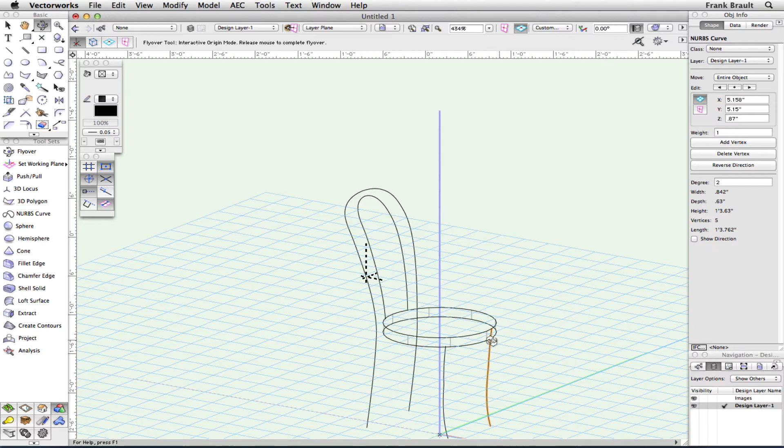Now I do want to get the shape of this thing going underneath, let's take a look what's happening. From the side, it comes around, so it follows this curve here, but it's a little smushed. So that's exactly how I'm going to do it.

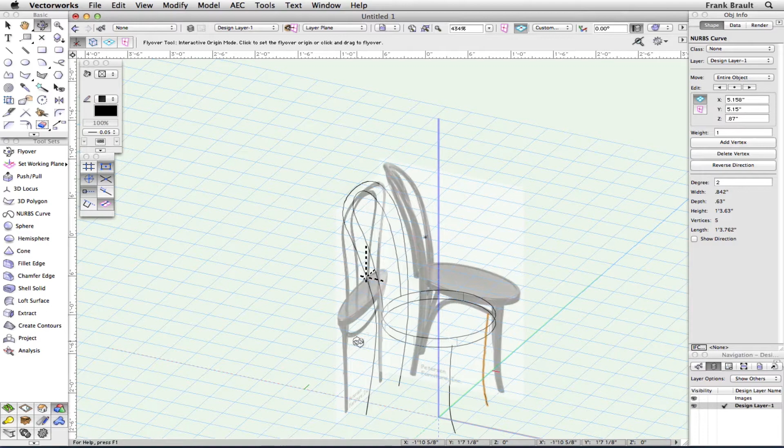I'm going to start with an arc to get that smushed look, and then from the back here I'm going to try to see this corner here. So I have to tilt it down, and then bring it around to the side. That's what I'm going to do next.

I don't need the images, so I'm going to turn them off. Look at it from the front and the top. And now I'm going to start.

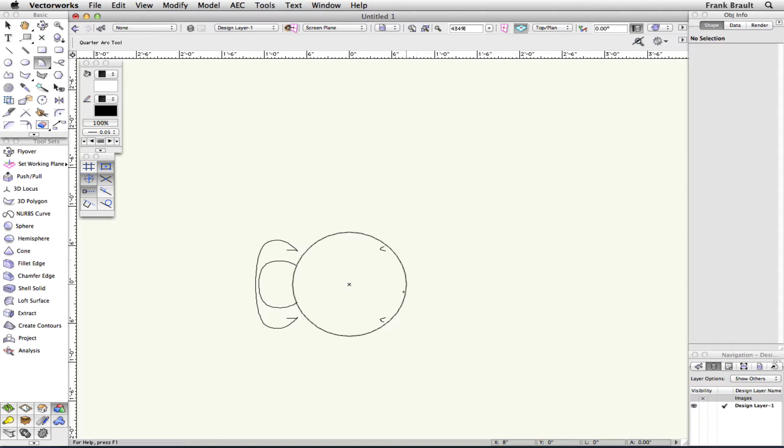There's an old tool underneath here called the quarter arc, and the quarter arc gives me the ability to draw a line that turns into a polyline when I'm done. I can convert that to a NURBS curve, and I want to bend it down.

I want to actually move it into place. Now it has to come forward just a little bit, and where it's coming forward is where the hole is on the cane chair seat. So I'm just pushing it down a little bit.

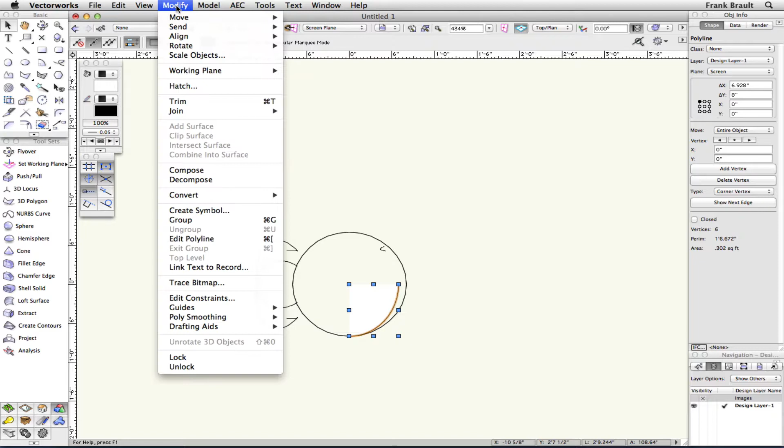I'm going to convert this to a NURBS curve. Modify, convert to NURBS curve.

And it's going to be on the ground, but now I can raise it up. I know this is 18 inches tall minus an inch and a half, and then I'm going to use a thickness of about an inch. So it'll be 18 in the air minus an inch and a half and minus, let's say, another 3/4. So that's minus 2.25.

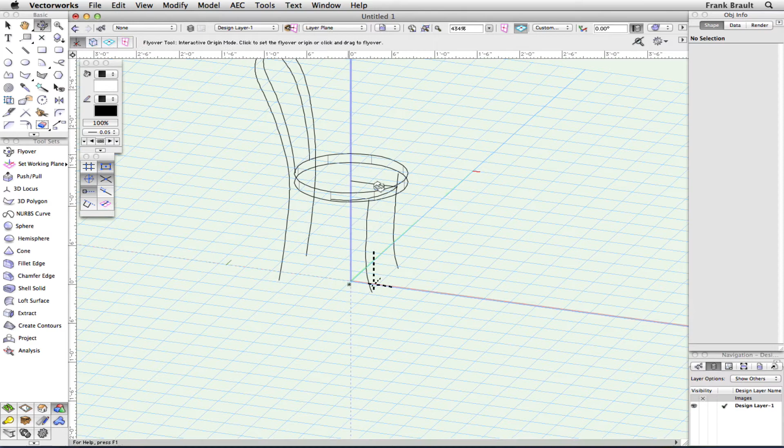So that's below, slightly below the chair. And I want to come down a little bit more than that, actually.

So I'm going to move it down by selecting it and filling in the Z value. So minus another 3/4, let's say minus 1.25 again. That way, that'll be more like it.

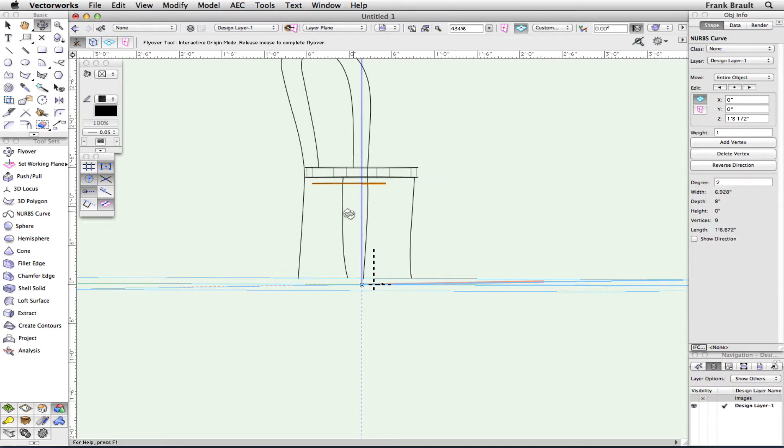Now what I want to do is bend it down. So if I use the reshape tool, and this time I'm going to lock the Z-axis, what I'm going to do is tip just a little bit. So I'm going to choose the...

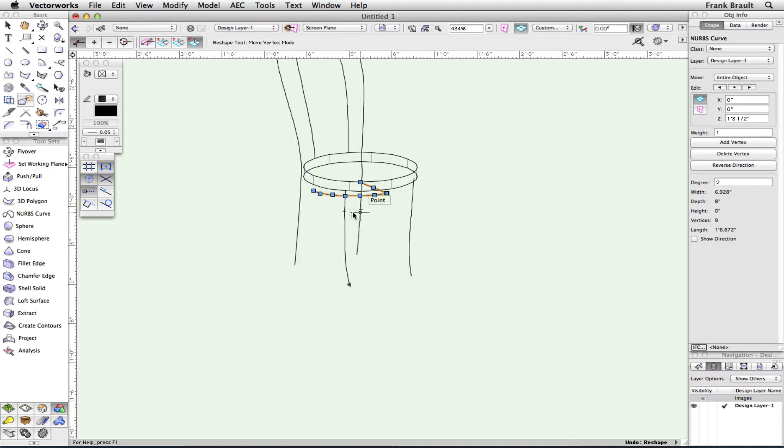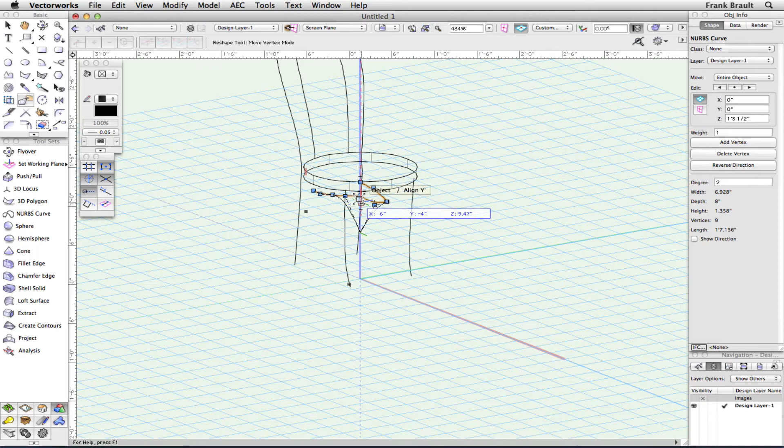That one, and that is 1 foot 3.5, and I could do the same thing here, 1 foot 3.5 or so, and then move this one down a little bit more. I might have to do that from an angle because it's turning more than I want.

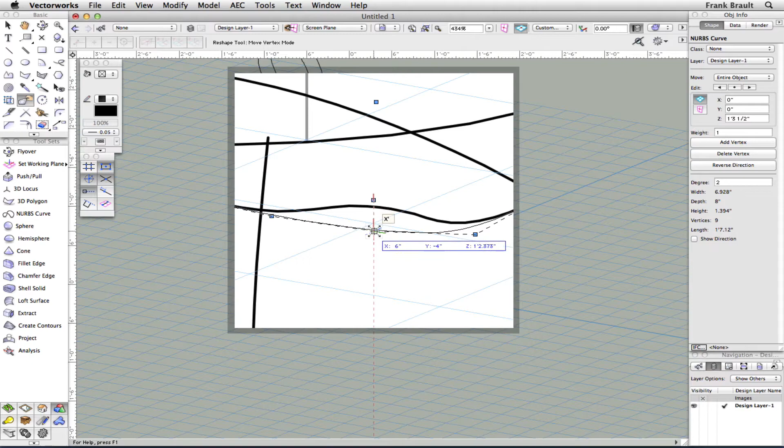So what I'm going to do is adjust to make it a curve. What I want to do is adjust this down. I'm just doing this by eye, actually, at this point. Nice smooth curve, and let's take a look. Like that.

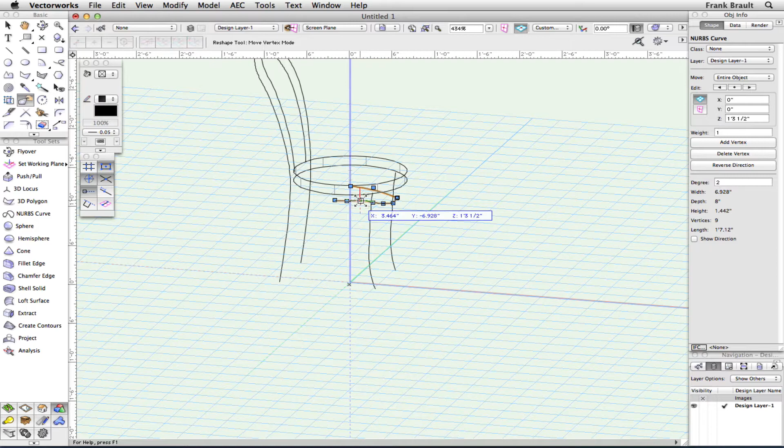And I'm going to continue the curve. So at this point, really what I'm doing is adjusting all those Z values. Pressing the Z key again, and I want a nice smooth curve. And this one.

Again, I'm using that Z key so that I can get this nice curve part. Now let's take a look. And it looks like I want to come down in the front now a little bit.

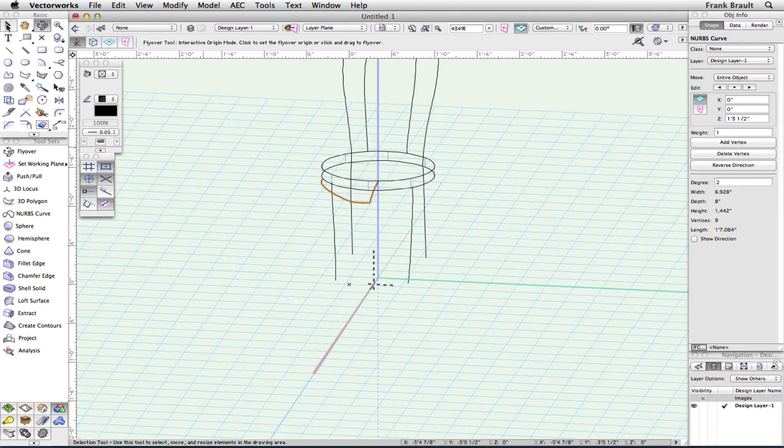And the reason I can do this is because I've got the Z-axis constraint here. The only thing I can do is take it down. And I want this to be more or less tangent to that curve as it goes back the other way.

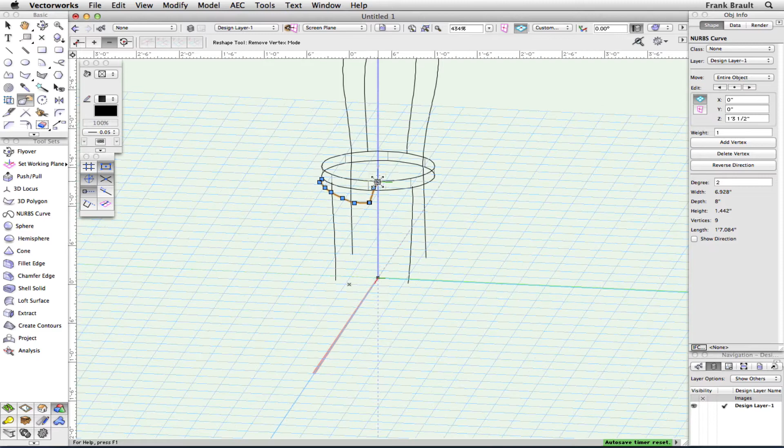Now I want to take off the one segment back here, so I'm going to click on the minus sign, which is the delete or remove vertex, and I'm just going to take these two away so that I'll be able to have that come around, which looks good.

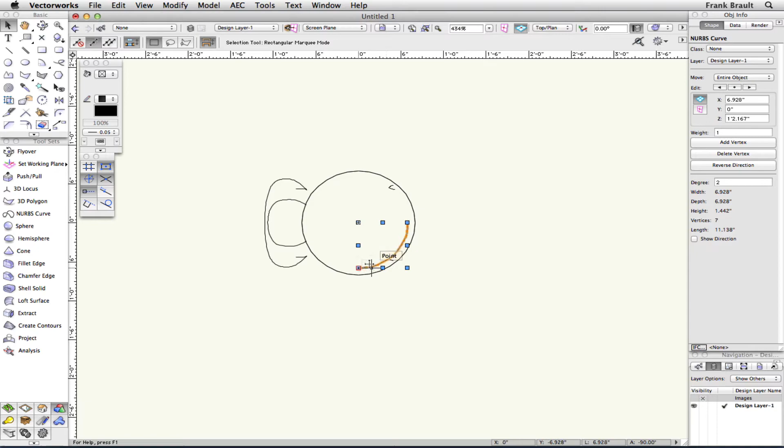It's a little rough, but I can probably fix that as I go. Now I switch to the top because I need to smoosh this in from the top, because it's got to come around in back of the leg. So I just smooshed it around.

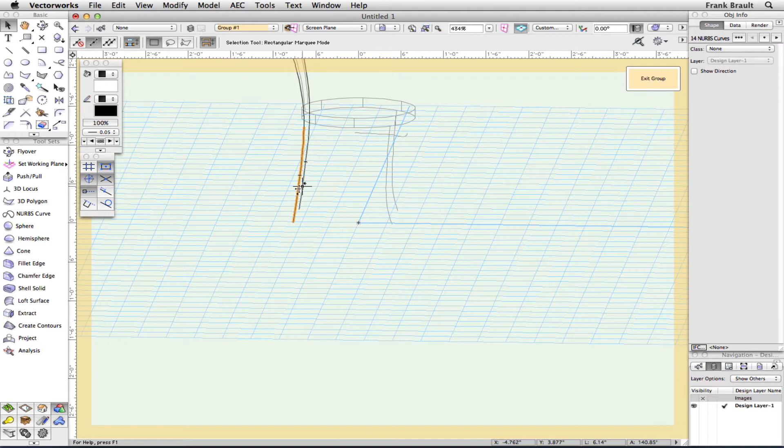And now what I need to do is be able to come off of this corner and then come back down here. So I'm going to steal a little bit of this face by copying inside the group here. I'm just going to grab this piece, copy, exit the group, and paste in place.

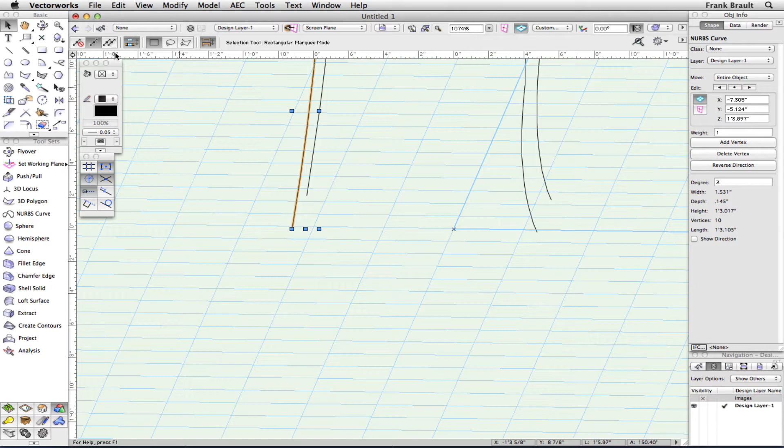It's probably not going to be exactly right, but what I need to do is come over a little bit now. So I want to look at it from the front, and I want to just move it over.

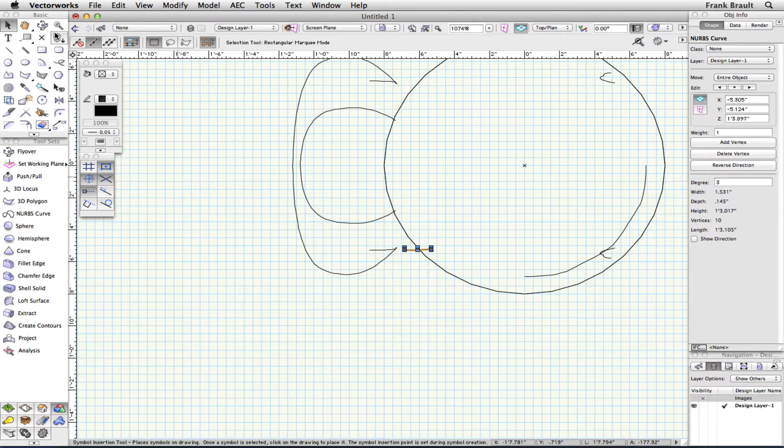Really what I could do is decide in the x-axis I need to move it over about 1.25 inches, or let's say 2 inches. So it's -7, and I just want to add 2 inches to that. So that just pushes it over a little bit like that. Let's see if it might be too much.

Just to keep it separate, I just want to keep it separate for now. And what I want to do now is blend between these two.

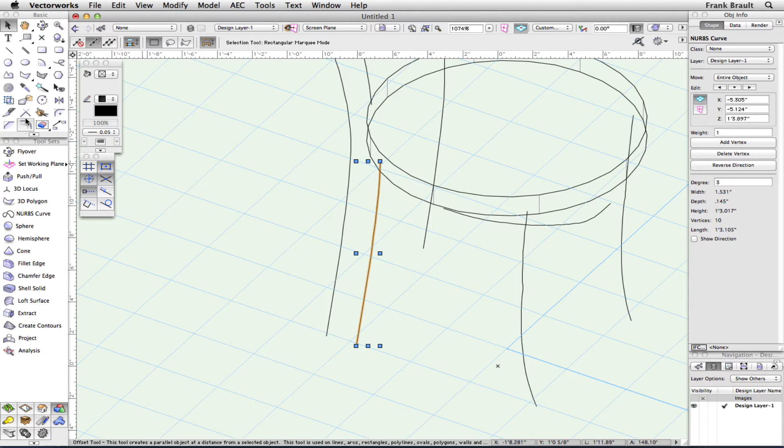And so I'm going to attempt anyway to use a blend command between this one and this one. And I want to blend by curvature. And let's see what I've got.

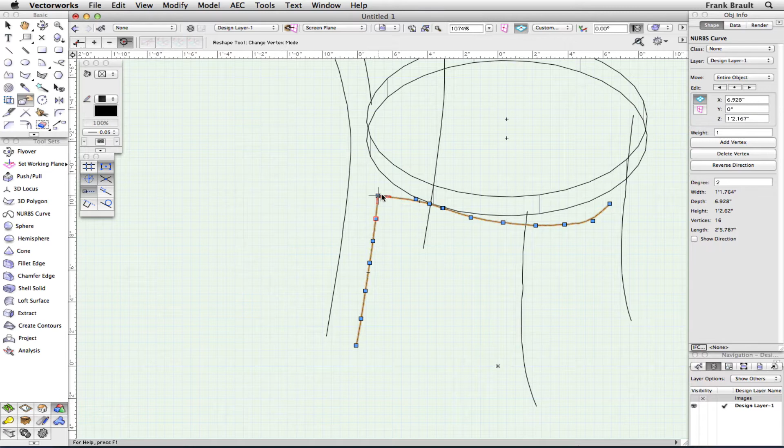So it looks like that gives me that line, and I might just want to delete this corner or change the corner to a curve like that. Looks like I want to delete this corner really there. So that's pretty much the curve that I'm looking for.

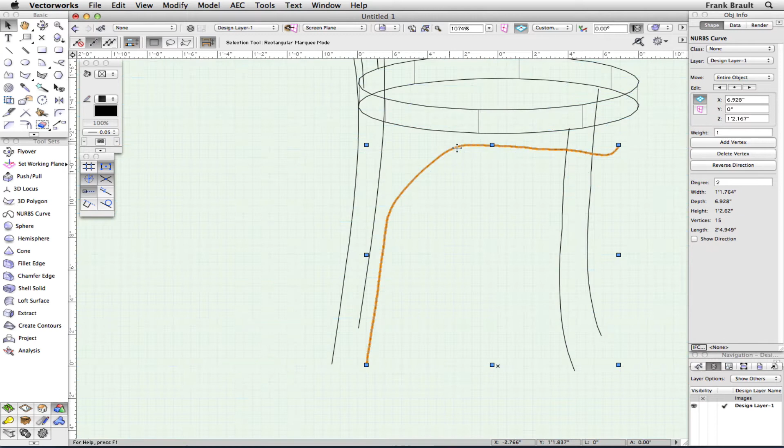It's a little rough, but I could work on it a little bit and get that a little more clean using the z-axis constraint again, and just moving a couple of these points down, like maybe this one needs to come over some.

In order to move it that direction, I need to move the y-axis, not the z. And then this one in the z-axis, I just want to drag this up a little bit so it's a little less. It's kind of like what I want now.

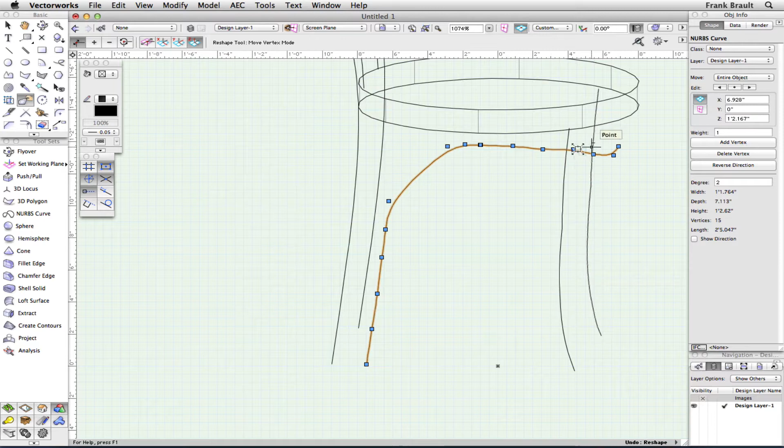I'm going to move this z-axis down. So this is- oops. This is not quite as pretty, but this is getting more of the shape that I want.

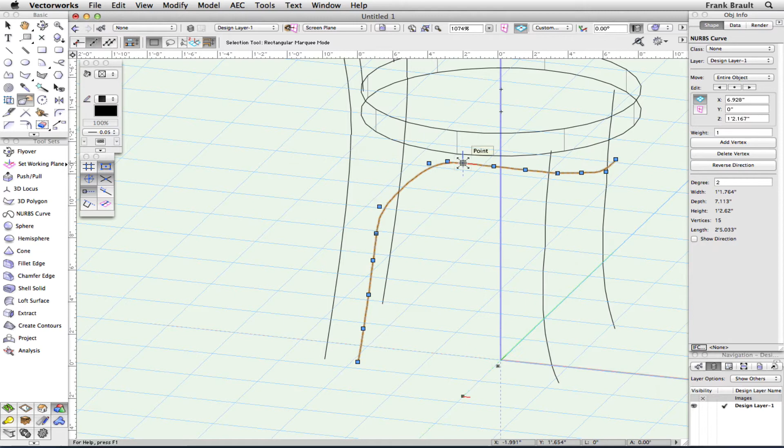There we go. And it looks like right here it's a little knobby, so I just have to change that. So I'm going to go to the top view, and these three that are next to each other- I think this is why this is lumpy here. So I just want to move it.

Now I switch to the working plane mode, and I'm in screen plane, so hopefully it's not going to change the z-axis. Just going to make that follow, and something like that.

So now that's probably a curved shape. That's close. Let's see what I did in 3D now. Yeah.

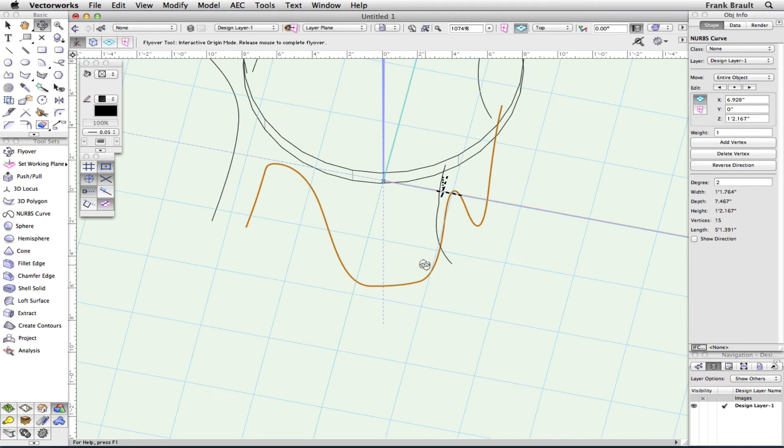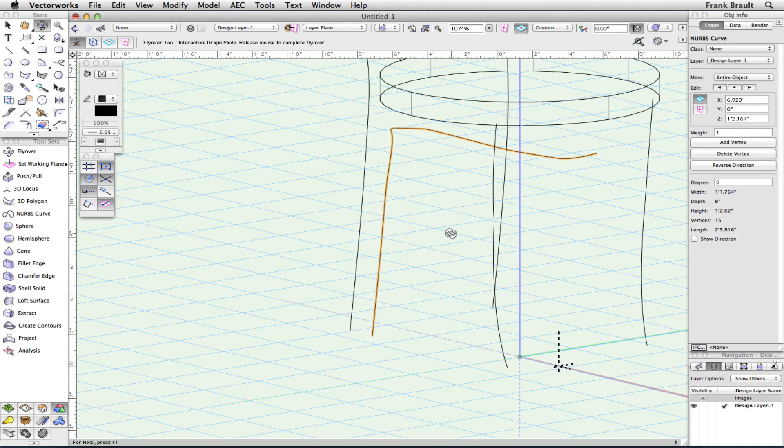What was happening? All right, so what I want to do then is- probably there's a point where you just want to walk away. I don't think you want to move too much of this, because what tends to happen is you work it too much.

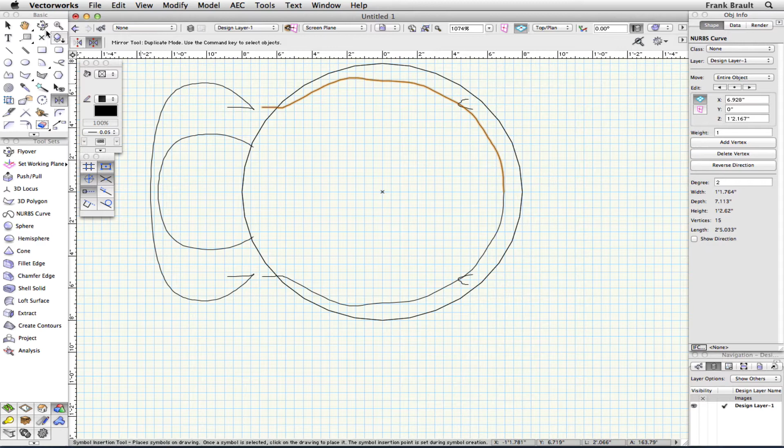So that's what I'm going to go with, and look at it from this edge, and what I want to do now is mirror this across the center line.

And make them a single object by using the compose command. All right, a single NURBS curve. Now this is a NURBS curve, and this is a group. So I still have to select all these.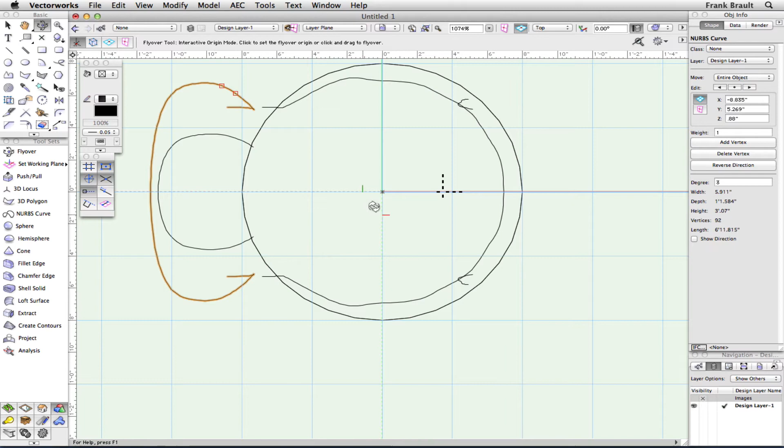I double click to get inside the group. I select all these and use the compose command to get a single NURBS curve, because that's ultimately what I want. Now that it's a single NURBS curve, I can ungroup it so that these are all part of the same object.

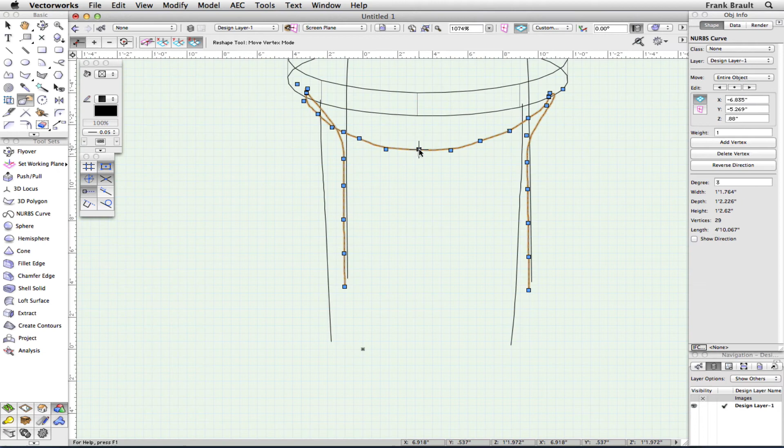Okay, so not too happy about this one. Just one more little thing, which is there's a point here, and I just want to bring that down a little bit. Z-axis constrain on the move by points, on the reshape command, and I just want to get that down. Z, so it's a little smoother, maybe even just a little more.

Something like that. So I've got that shape, and this is one I did by hand, and you can see that they're a little shaky, but they are in fact nice. It's a matter of using the technique to get the shape in, because it's a very complex curve.

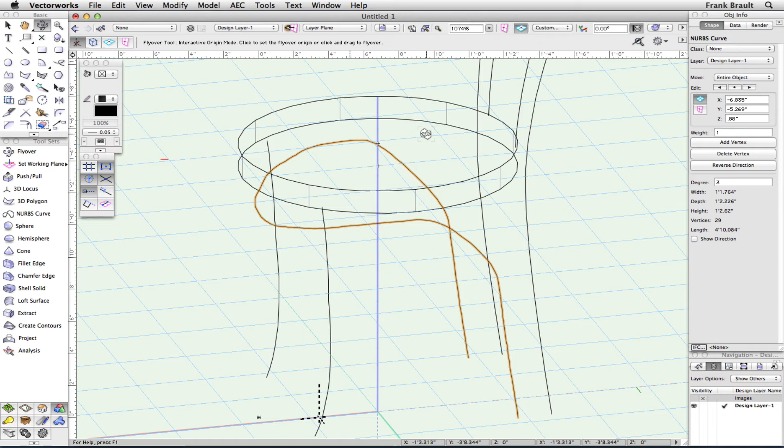So I started with a quarter curve. I added this point, and then I flipped it to get the symmetrical quality. I think we're good to go. What I want to do now is start putting these corners in.

I want to use the layer plane now, so I can change the size. Put a circle for the cane, for the bentwood part now. So this is going to be...

1 1/2 inch radius, or let's say even 3. I want 7/8 of a diameter. So I'm going to say 7/8 for the diameter. That seems still a little big, so I'm going to say 6/8 is 3/4, so I'm going to say 6/8. So that's what I'm going to do for this.

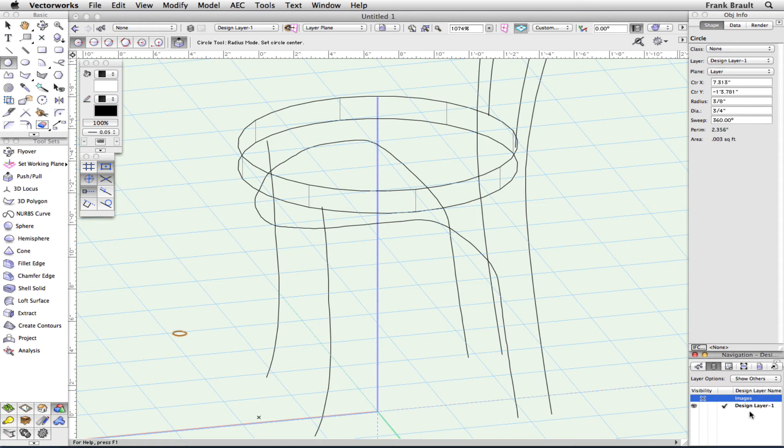Let's take a look at the image, and we can see it's probably good. This looks a little thinner. A little thicker up here, so we'll make that a little thicker.

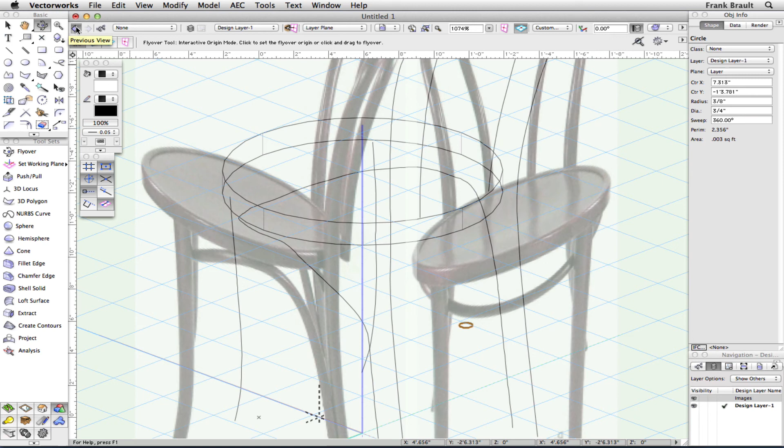And the ones in the back are probably a little thicker as well. Let's just take a look. And the outside ones look thicker, and the inside ones- so the legs are going to be, let's say, 1 inch, and we can do something about that. So I'll turn them off again.

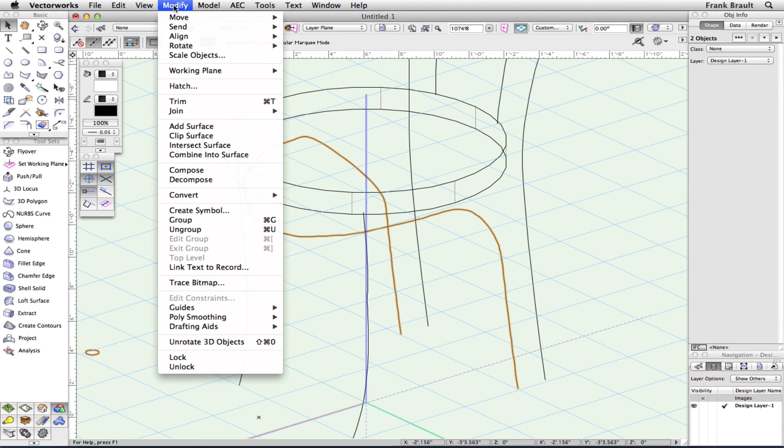So now I'm ready to copy this, because I'm going to have to use this several times. So edit, copy, and the legs are thick, so this is the one piece that I'm going to extrude along path. So model, extrude along path, and I have to pick the path, which it is. Boom, there's one, and then this one. These are the legs, but these are going to be the thinner ones.

So I'm just going to zoom out and paste. I'm going to click over here and then paste. Excuse me. And the last click is where it will paste. Obviously, it pastes at the layer plane, so it's at 0. It's way back there, but I'm using it just to keep track of where it gets pasted, so I can see it when I'm working with it and selecting it.

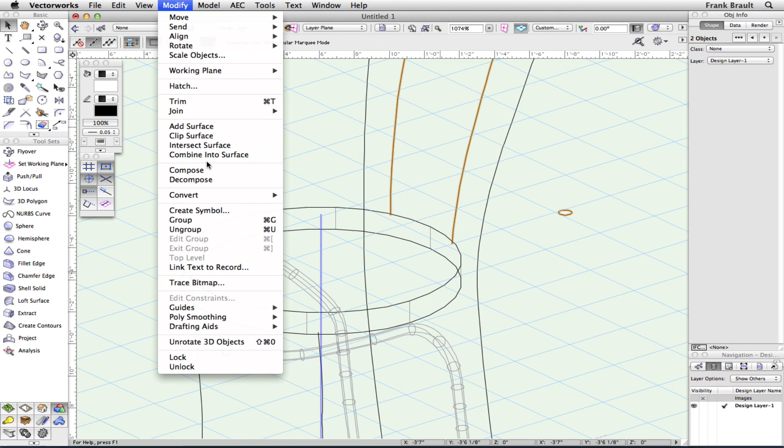So now I want to choose model and extrude along path again, picking the path. And there's the other guy. And now what I want to do is I'll click out here somewhere and paste.

But I want it to be a little thicker this time. So I'm going to choose 1 inch instead. And so it's a little thicker. And copy this so that I can capture it again when I go to do the chair.